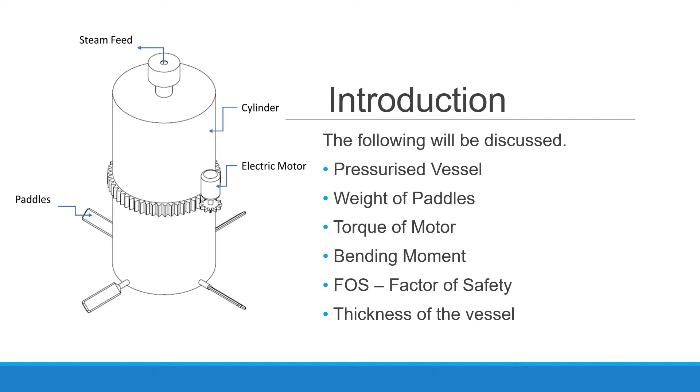We'll also be looking at the factor of safety and the thickness of the vessel. The background of a system like this falls within multiple industries, where the food industry would use something like this to mix ingredients. Slurry mixers are used to agitate mixtures of chemicals, loosening of soil and mixing fertilizer for farms, etc.

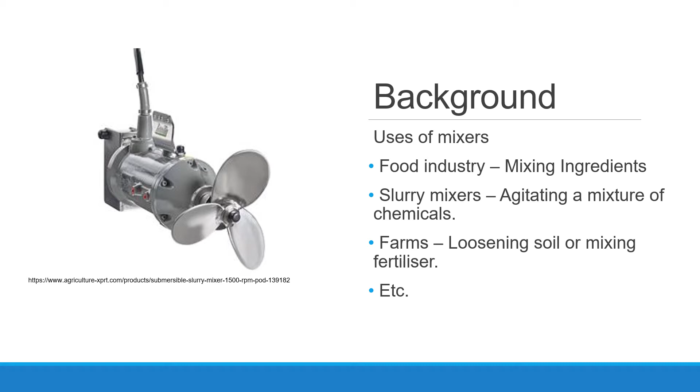The reason for failures in thin wall vessels would be incorrect design strategies, inaccurate calculations, wrong material, inadequate testing, inexperienced workers, or poor fabrication methods. All this should be checked with an engineer, or should be done by an engineer, hopefully a skilled one.

In terms of failure of the vessel itself, there are different types of failing: elastic buckling, brittleness failure, corrosion, stress corrosion, materials being too ductile, which means they've got too much strain or a high strain on them, instability causing cyclic strain, or creep.

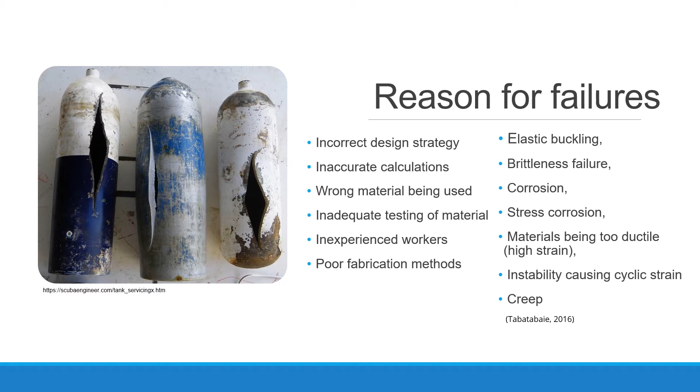Next, the problem that we will be dealing with, as mentioned in the introduction, is what range of thickness the vessel is or should be for a different factor of safety, or for a certain factor of safety.

Influencing forces on the system would be the pressure, the motor, the paddle and the gear, which causes a bending moment, and all of these have a different influence on the stress in the system.

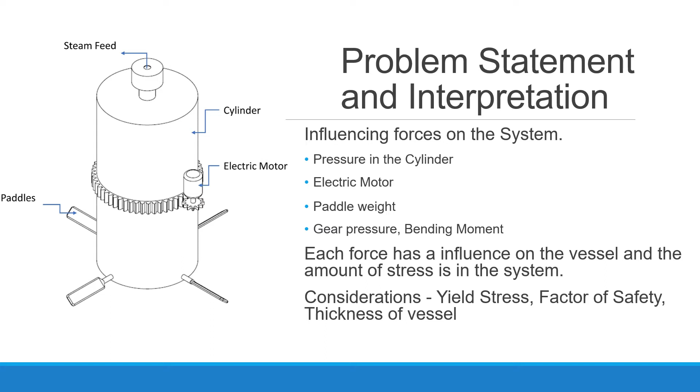The different considerations that should be taken into consideration are the yield stress, the factor of safety, and the thickness of the vessel.

The next part is the analysis. We'll be analyzing all of these five parts with the equations and a graphical representation of the system, as well as the calculations for pressure, tensile, torque, bending moment, and the combined result.

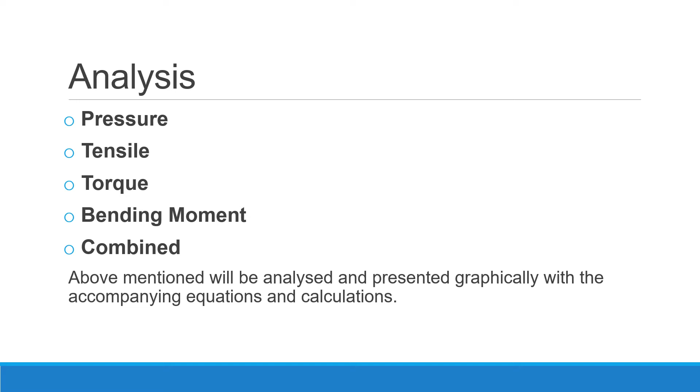Pressure. The first part that we'll be dealing with is a force due to pressure in the vessel. This force works outwards and then creates two different types of stresses: one being hoop stress and the second one being longitudinal stress.

In the calculation you can see that hoop stress is determined to be 40 megapascals and longitudinal stress to be 20 megapascals. The observation can be made that hoop stress is twice the size of the longitudinal stress, or longitudinal stress is half of the hoop stress.

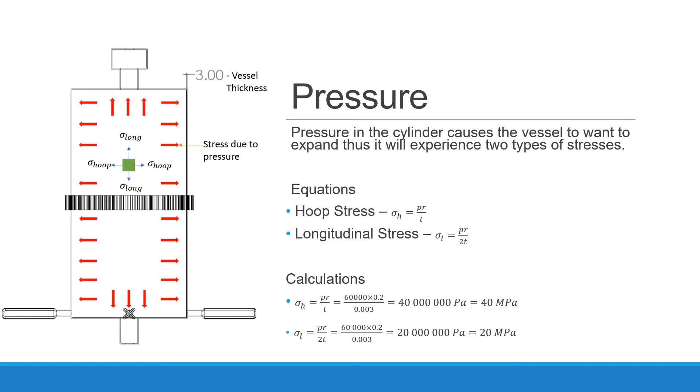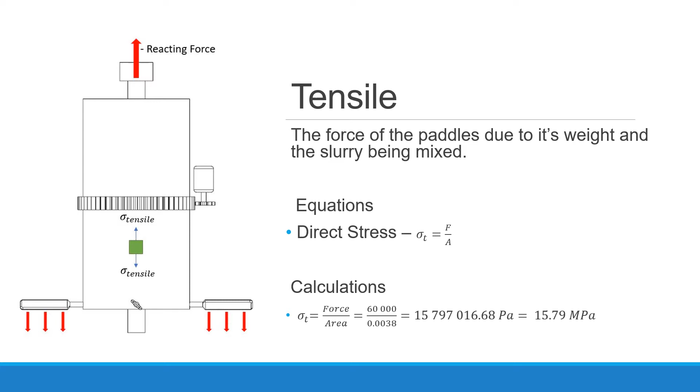Tensile stress. This stress is due to the force of the paddles due to its weight, or due to the fact that it is mixing the slurry. The weight on this would be 60 kilonewton, and using the formula provided, which is force over area, we can then determine the tensile stress, which is 15.79 megapascals.

Torque. A torque applied by the motor - we've got only the power of the motor and the rotational speed of the motor. Thus we can take the formula: power is equal to torque times 2 times pi times the rotational speed in revs per minute, divided by 60.

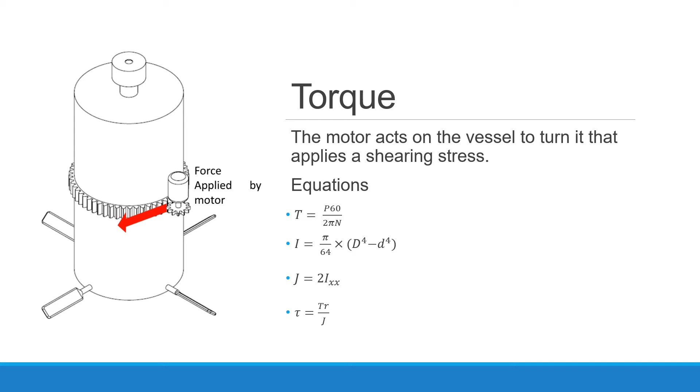And then after that we would need to work out the second moment of inertia, as you can see on the formula, and then the polar moment, which is just twice the second moment of inertia. And if you've got all that information, you can work out the shear stress.

As seen on the diagram, you can see the different shear stress that's applied with the green block and the direction of it, and you can also see the rotation, direction of the motor, and how the force is applied.

Following the calculations, you can see that torque is equal to 31.83 kilonewton meter. The second moment of inertia is 7.71 times 10 to the negative 5 meter to the fourth.

Next, we'll take the second moment of inertia and multiply that by 2 to get the polar moment, and with that you will get 1.54 times 10 to the negative 4 meter to the 4.

Once we've done all that, we can then determine the shear stress, which is equal to the torque times the radius divided by the polar moment, which gives us a shear stress of 41.89 megapascal.

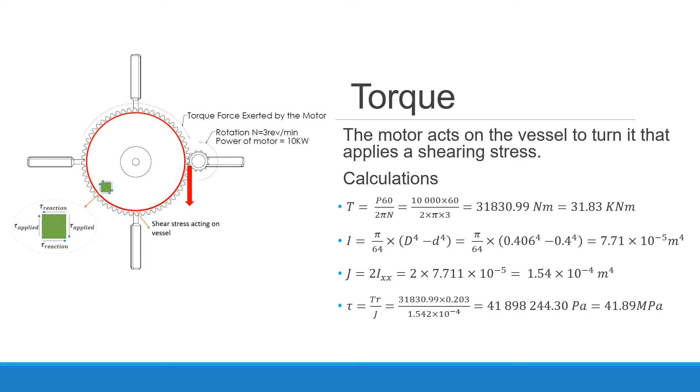Next is the bending moment. The bending moment is due to the gear pushing on the vessel from the side to keep it in place. You'll see that the vessel has a central axis, and it will bend around that axis to the side, to the opposite side of the force.

On the opposite side of the force, you will find the tensile side, and that is also where the maximum stress is applied, due to it being the furthest from the central axis. On the other side, you will find the compressive force, which is negative, exactly the same as the max stress except for being negative.

In the calculations below, you'll see the max stress is equal to 60.54 megapascals, where the compressive stress is then equal to negative 60.54 megapascal.

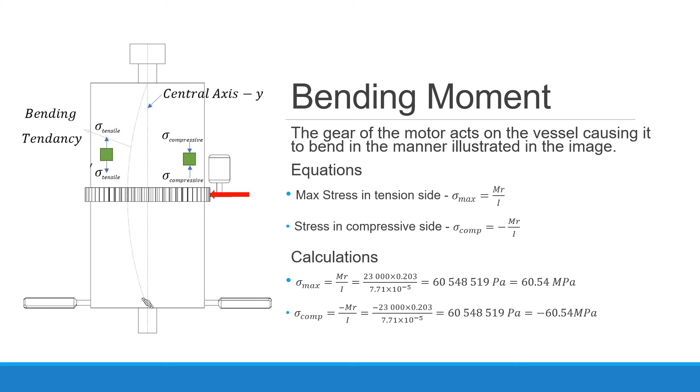Next, the combination of stresses. Different stresses or different forces have a different way of working onto the system, so we can't just add or subtract them, we need to use certain equations.

For the first part, we'll use the equation sigma x equals sigma L plus sigma T plus sigma B, where sigma L is the longitudinal stress, sigma T is the tensile stress, and sigma B is the bending moment max stress. Once we've got sigma x, we can plug it into a formula to get sigma P1.

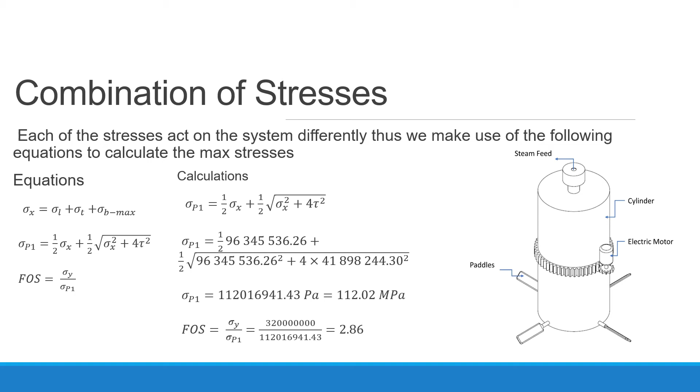Sigma P1 is then equal to 112.02 megapascals. Once we've calculated that, we can use the yield stress, which is 320 megapascals, and divide it by the principal stress of 112.02 megapascals to get a factor of safety. In this case, the factor of safety will be 2.86.

Validation of your calculations is very important to get accurate results. This can help reduce failures in systems.

At the end of the day, calculations are only as accurate as the decimal points that are used. For example, we'll round off to the second or third decimal, whereas Excel would use the full range of decimals, yielding a more accurate result.

Graphically, Excel is a great assistant in visualizing the impact of stresses on the system. In the next two slides, we'll see the graphs that we've drawn up.

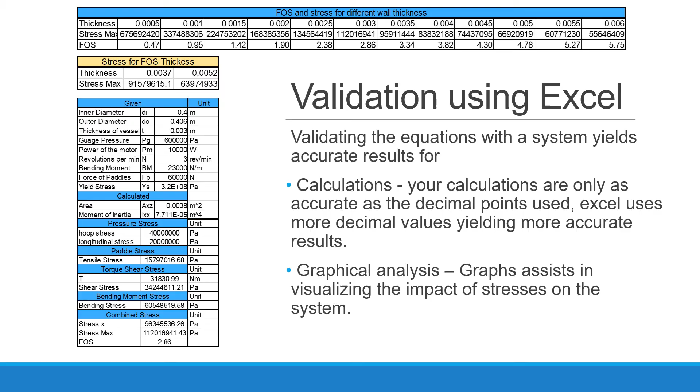The first one is the factor of safety versus the thickness of the vessel. This creates a straight line, and this straight line formula is used with a y value, a factor of safety value of 3.5 and 5, to determine the thickness range from the minimum to the maximum factor of safety.

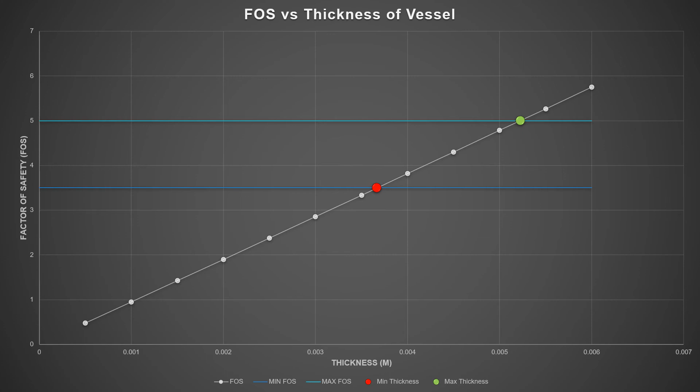We also plotted the stress versus thickness of the vessel to determine an equation for this data set, which we can then use to determine what the thickness would be at the maximum or yield stress.

This isn't critical, but it's always good to see what the minimum thickness of the vessel could be, or should be, before it fails.

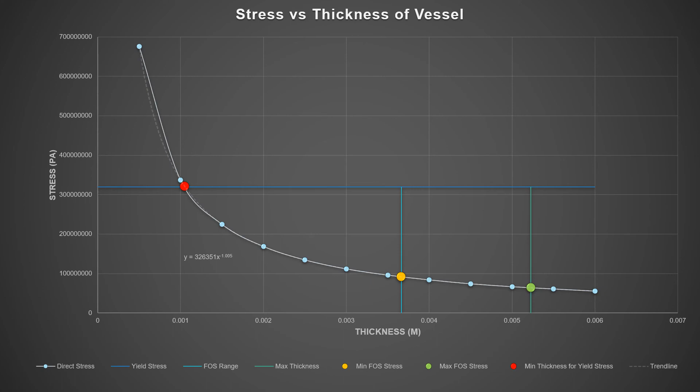So to discuss the factor of safety: it is very important, as people can get hurt. If a vessel explodes, large pressures are exerted and massive forces can kill people or hurt them severely.

On the production side, if a machine is broken, you often have to replace it, or it's down and you can't use it for a certain time, which means you're losing money.

And then there's also the lifespan of the machine. If you design the machine for a longer lifespan, or perhaps a bigger factor of safety, it will last longer, as it can handle more pressure and better fatigue.

So for this system, for heated pressure vessels, it's known to use a factor of safety of between 3.5 and 5.

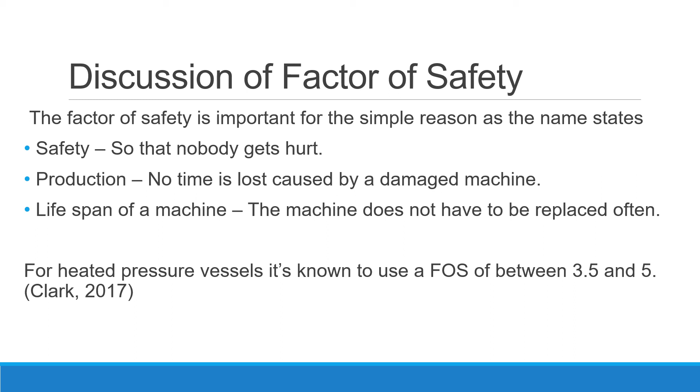For this analysis, the calculations show that at failure, which is 320 megapascals (the yield stress), the thickness of the vessel is 1.05 millimeters.

After that, we take the minimum factor of safety, which yields a thickness of 3.7 millimeters and gives us a stress of 91.57 megapascals.

Then we looked at the factor of safety of 5, which yields a thickness of the vessel of 5.2 millimeters and a stress of 63.97 megapascals.

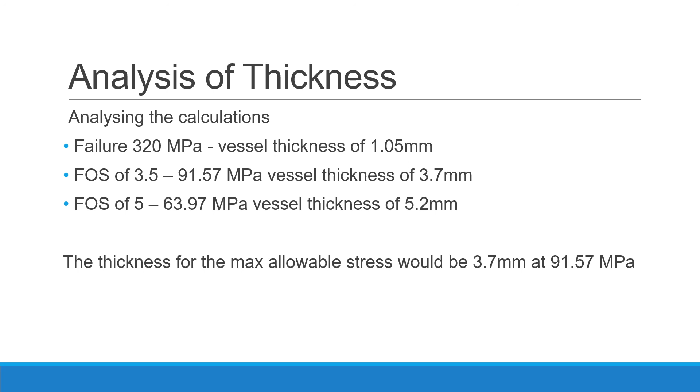The thickness for the max stress would then be 3.7 millimeters, giving us a stress of 91.57 megapascals. In conclusion, the thickness we would use for the system to give us the max stress factor would be 3.7 millimeters.

However, I would recommend that a 4 millimeter thickness be used, as it is more standard and yields a better factor of safety.

This might also reduce cost and be more readily available, as manufacturing needs to take place to make these vessels or systems. Thank you very much.